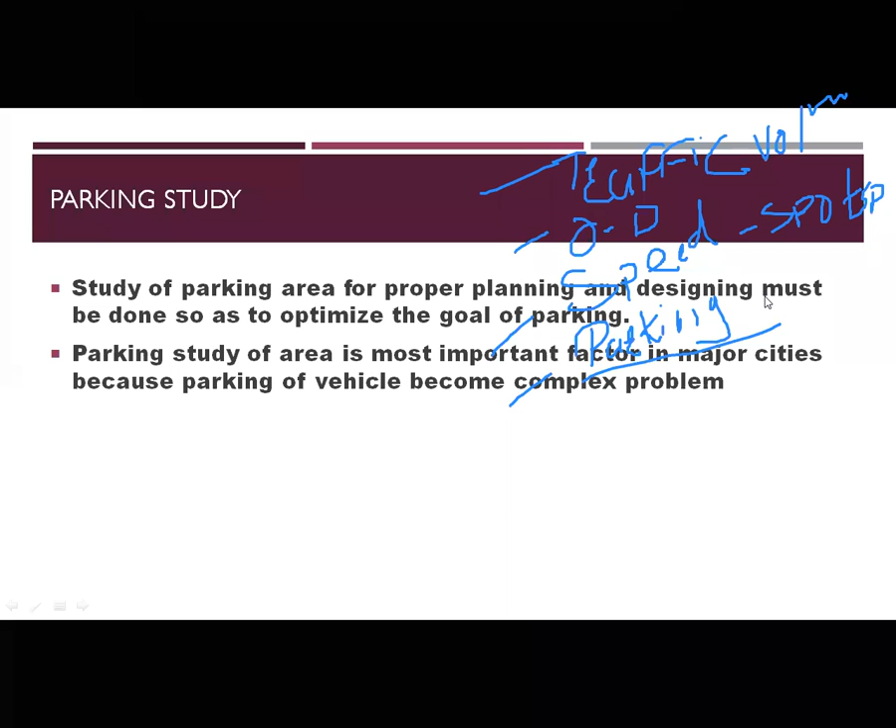And now the last study is the parking study. Okay, which is parking study. So there are many studies, and from these we have selected four studies which deal with different kinds of data or areas of traffic engineering. So the last study we were studying was the parking study. We have covered some points from this study, and now we will move ahead.

Okay, so the parking study is the study of the area regarding parking. Parking is and will be a major crisis in a developing country like India, where the population is huge and the road users are also huge. So parking the vehicle will be the major problem. First, where to park is the major problem, and when you park it, it should not affect the road user or road. So that was what we were seeing.

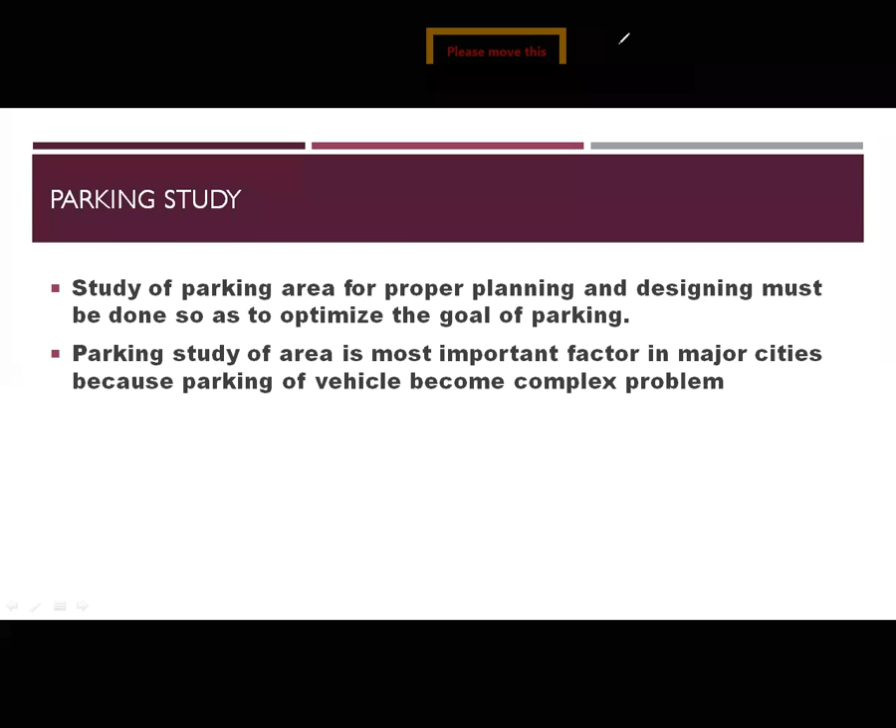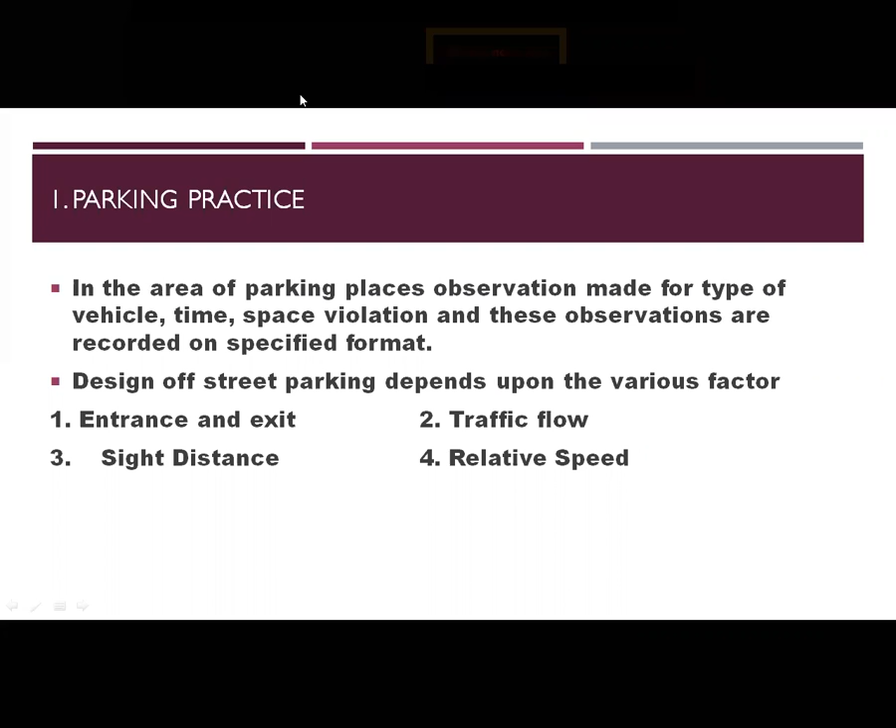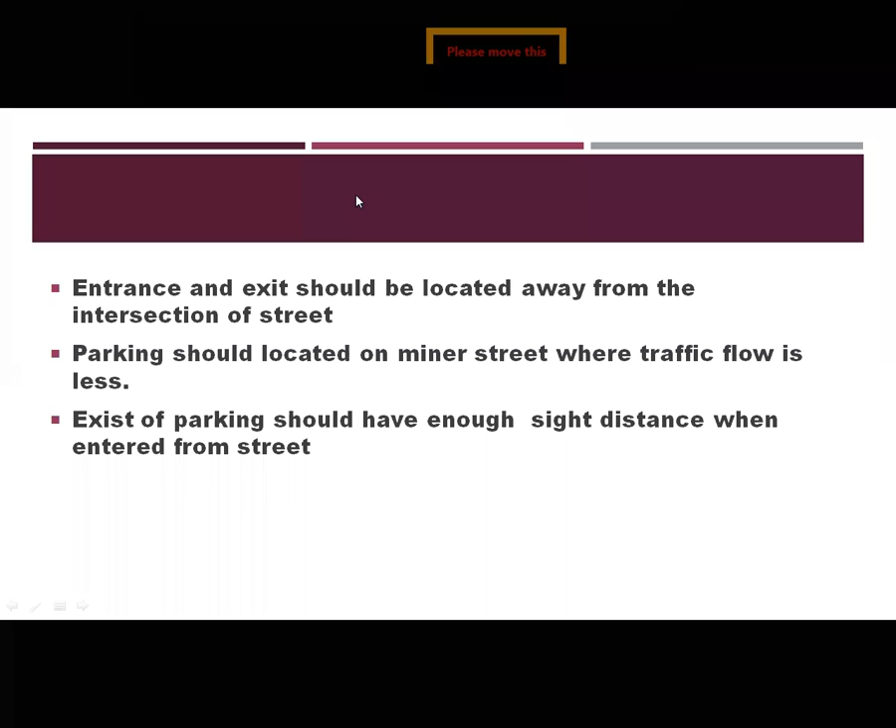In the last video we considered what parking practice is, what is the habit of people to park the vehicle, where they park, what are the major design flaws in the parking area, and what should be done, like entrance and exit of the parking lot should be on opposite sides. Or the parking area should be away from the road crossing. The parking should be located on the minor street, where the traffic is very less. The exit of a parking lot should have enough sight distance, etc.

So there are different methods of providing on-street parking. When we are providing parking near the road, there are four types. The first one is parallel curb parking. In that, vehicles are parked adjacent to the road, parallel to the curb, or we could say footpath or edge of the road.

Next is right angle parking, when enough width of the road is available, or when a separate parking lot is provided. In that situation you could provide perpendicular parking. So right angle parking is where you park the vehicle perpendicular to the road surface. Next is oblique, with an angle, and the last one is parallel curb parking alternate.

So alternate in the sense that many times you have seen a board beside the road telling that parking is on the left or right side on even or odd days of the month.

Okay, so these are the alternate parking, so that sufficient width remains on the road for the traffic to move or travel. Okay, here another meaning of alternate is that

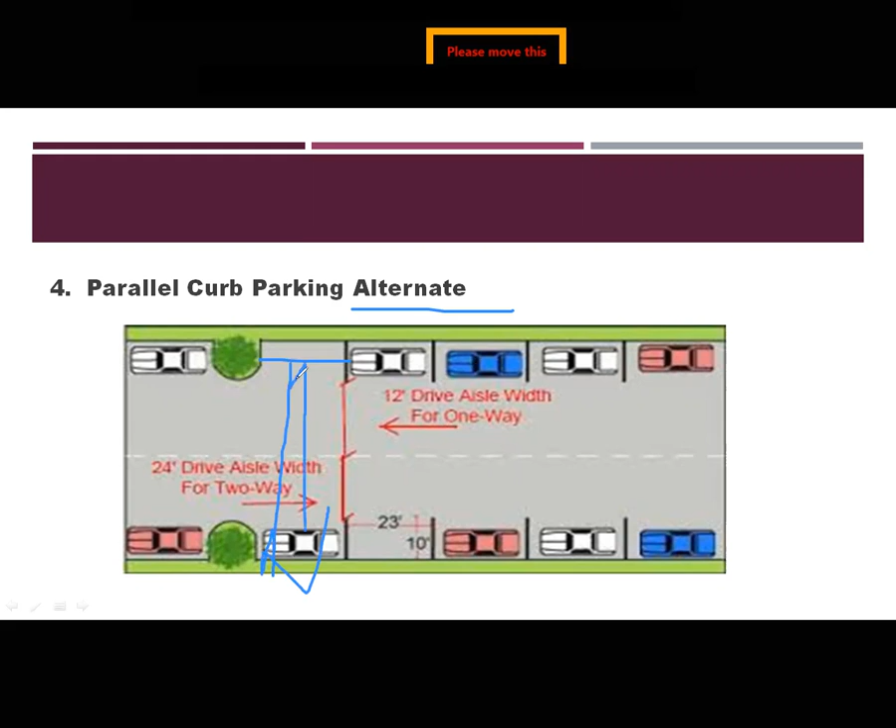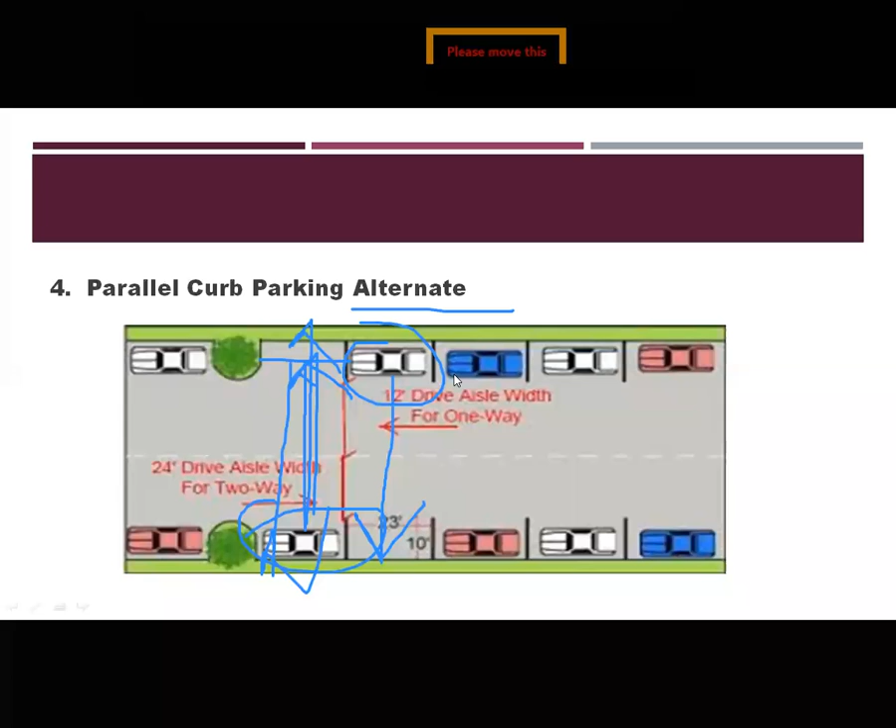the other side of the vehicle should not be parked. Like in this, here is one vehicle, and on this side there is no vehicle, so that sufficient width at the particular section of a road is kept. And then the other is like this: one vehicle parks here, and opposite it there is no vehicle. Okay.

Next is the space inventory. Okay. So what is the space inventory? The parking space of all types in the area should be listed and classified according to the traffic flow. Okay. Curb space is subclassified by location. Pay and park applied for the off-street parking.

So here the solution is the space inventory; the first point was the parking practice, what is the parking practice and the solution for the parking practice which exists in the particular area. Here the space inventory is the inventory to gather the data related to the parking of the particular area and provide a classified solution with respect to it.

Okay, so parking space of all types in the area should be listed and classified according to traffic flow. Okay, so in this particular area of, sorry, around 7 kilo, we could say 10 kilometer square, whatever the parking on street and off street should be classified, and according to the maximum traffic condition there, the parking is provided.

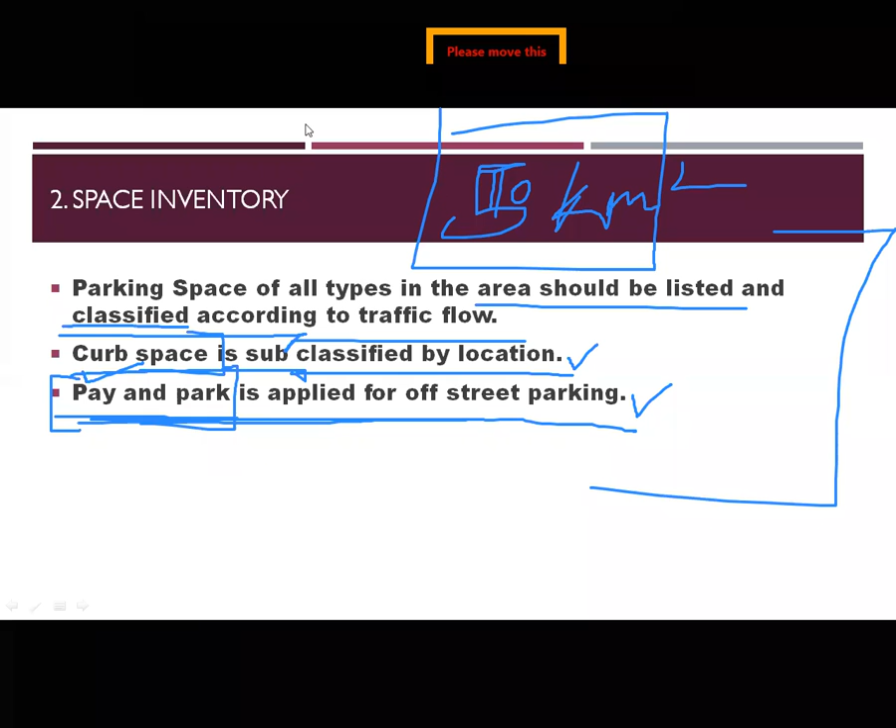These are the space inventory, which inform about how to use the space available nearby for the parking.

Personal interview: an interview of a driver may be taken by questionnaire, postal card left at the windshield, or sidewalk, or in the office. The interview of a driver may be taken by different means, meaning some questions are asked to the driver.

The question asked and answer will be obtained through different means, like postal card or visiting the office. If an office has staff, we automatically get more data with classification, such as how many employees are coming from where, how many are carrying a vehicle, how many are using public transportation, and where they parked the vehicle if there is a separate system provided for parking. We get answers to these questions.